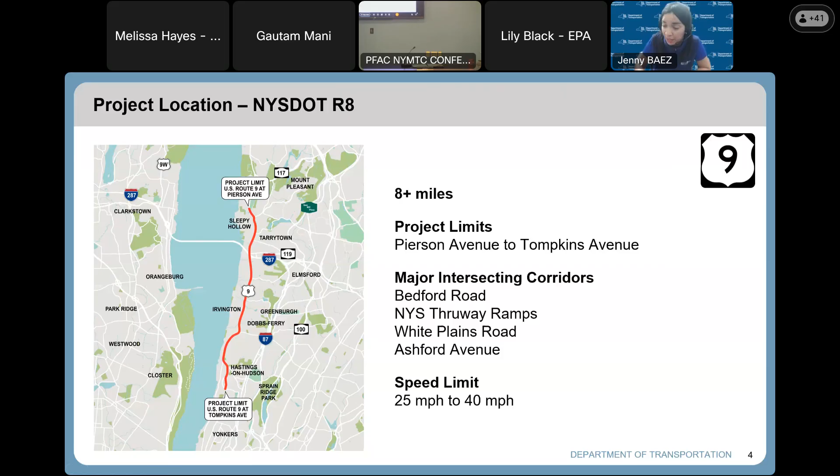This is a very important corridor because it connects the counties of Westchester and Rockland with the new Tappan Zee Bridge, and it also serves as a connection for 5 Metro North Railroad stations, the Bee Line, and the Lower Hudson Transit Link system.

This project builds on a strong foundation of planning studies and local visioning that preceded it. In 2018, for example, the Route 9 Active Transportation Conceptual Design Plan was undertaken by the 5 river villages that span the project. It was funded through the New NY Bridge Project Community Benefit Fund with the goal of promoting historic, cultural, and natural resources of the villages. It also aimed to enhance access to the new Tappan Zee Bridge and to accommodate all modes of transportation while enhancing traffic safety.

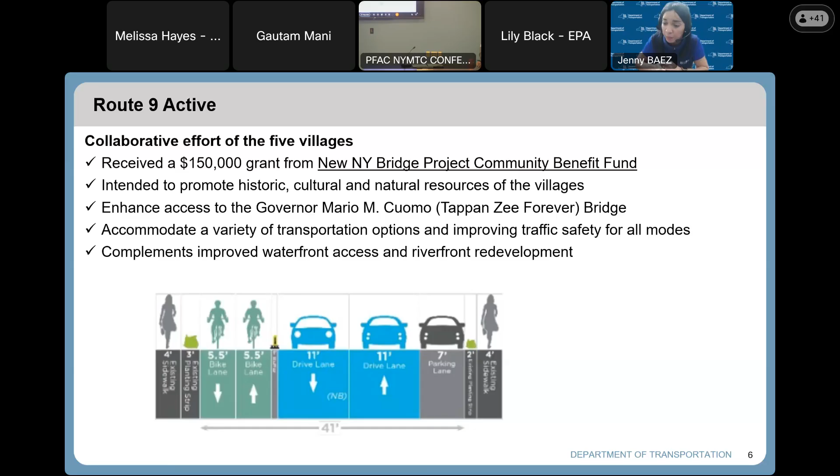The challenge we had here was to use New York State DOT required designs. We also needed to identify what cross sections remained feasible within the available right-of-way to accommodate sidewalks, buffers, widths of traffic lanes, and also parking spaces.

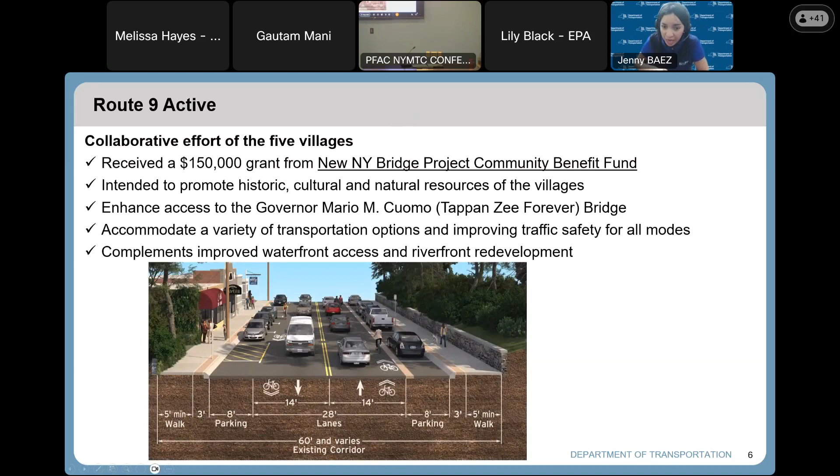The next slide will dive into the history of this area. This corridor is rich in culture and historic resources. So with that, I'll hand it over to Scott, who will talk about the area history.

Thank you, Jenny. Good morning, everybody. As Jenny mentioned, this area of the Hudson Valley, Westchester County, along the river through the 5 river towns or villages, you can't overstate the amount of history. If I had an hour to present this, I could do it just on the history.

So real quickly, I'd like to bring up that from Henry Hudson coming up the Hudson River in discovery, through the Dutch settlement in this area, the support of the Revolution, the French and Indian Wars, expansion for military needs, and eventually for travel through stagecoach, this corridor supported travel through Connecticut up to Boston and on up to Canada. Super rich history, and it's been ever evolving, which is a really good segue into the next slide.

That's the next step in the evolution of Route 9 through these 5 river towns. So what is a complete street? I guess the best way to state that is it's not a checklist. It's not a one size fits all. It's more like a process or a strategy and an expectation for an outcome considering context. So it's not going to be the same.

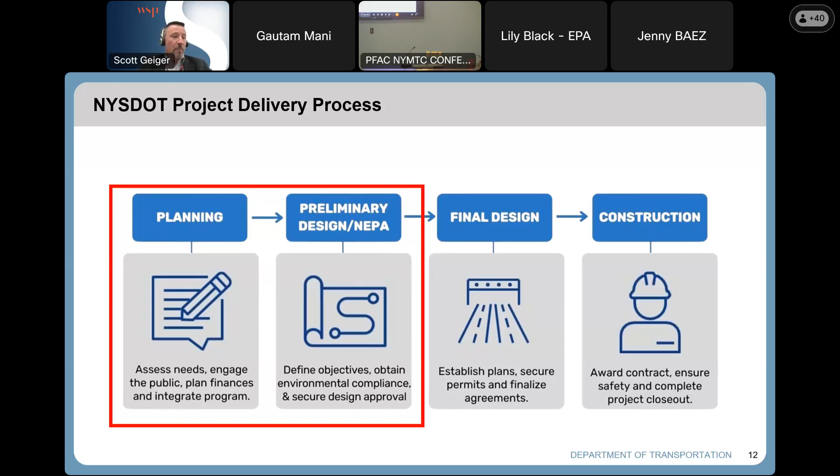Preliminary engineering, step 1: existing conditions and corridor vision. It's very important that we collect and understand the history, previous studies, needs, and future vision for each of the villages and the counties as a whole.

Step 2 is conceptual alternatives, which is really about the context and trying to be creative on how we can develop this roadway in a way that meets all the needs, provides the complete street, and moves it into the next phase of its evolution.

Step 3 was the evaluation of concepts that passed step 2 and become alternatives for consideration. They are evaluated against all the environmental, traffic, and other goals and objectives of the project created in step 1.

Finally, when we get through that, we document it in a design approval document, and we go again - I'll get into how we go through the process with the public through each one of these steps.

Segueing into that, here's the process with the public. This is a tried and true process where our first public meeting was our first elected officials meeting. We established a transportation partnering committee, about 20 or so individuals representing the 5 river villages.

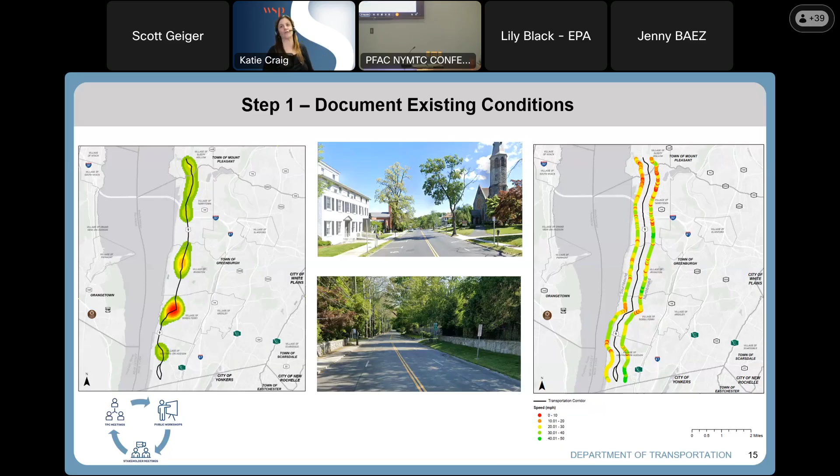The context of each one of these villages is very different, as you can see in these two photos. The first is Sleepy Hollow in Tarrytown, where you have one travel lane in each direction, as well as parking on both sides of the roadway with sidewalks on both sides.

The picture on the bottom is in the southern section of the corridor, the village of Hastings-on-Hudson - a much different context. You have a 2-lane section of roadway with sidewalk only on one side, as well as historical walls that line the corridor through these villages.

We can't touch these walls, we can't move them, and you can see discontinuous sidewalk on the other side of the road. So it's not only about the desktop reviews, but also immersing yourself in the corridor, getting out there, walking the different segments.

There were over 10 schools in this corridor, so we observed the many school arrivals and dismissals - how these students interact at the crosswalks is very different in the context of each one of these schools.

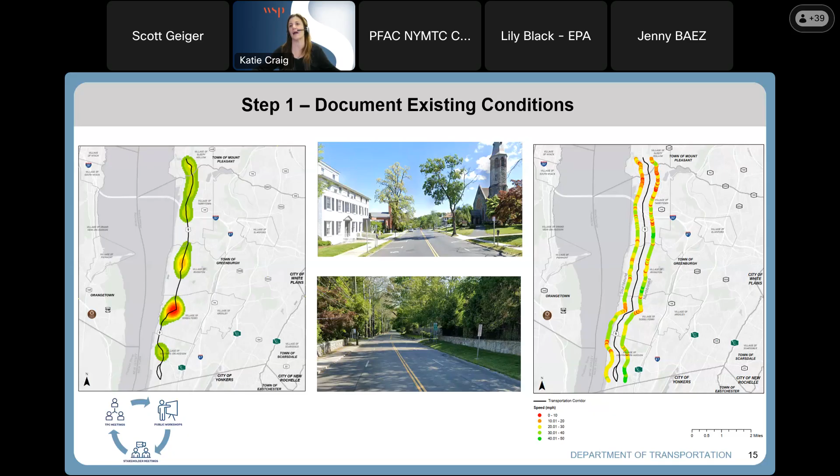So our step one, in this first phase approach, isn't just about the data that's out there today - it's understanding how the corridor works for all the users.

The second phase part of step one is developing your corridor vision, need, goals, and objectives. This is a structured 4-part framework that we use in all of our New York State DOT projects, and it helps set the foundation for every step of this transportation project.

As Scott described, we did this step with our TPC, our stakeholders, as well as the public in various different kinds of workshops.

First we set a vision - establishing the big picture, the broad sense of what you want the corridor to be. Then we identify and prioritize the needs in the corridor, not only as the project teams, but with our TPC and the public as well.

Then the goals are shaped by the needs that articulate the desired outcome we want to have for this project and this corridor.

Finally, we have our objectives, which make those abstract goals more concrete, measurable, and actionable. The objectives are very important because this is how we evaluate whether our concepts really pass the test and can be progressed.

Here's a little example of a worksheet that we use to help the TPC, the public, and ourselves prioritize the needs of the corridor.

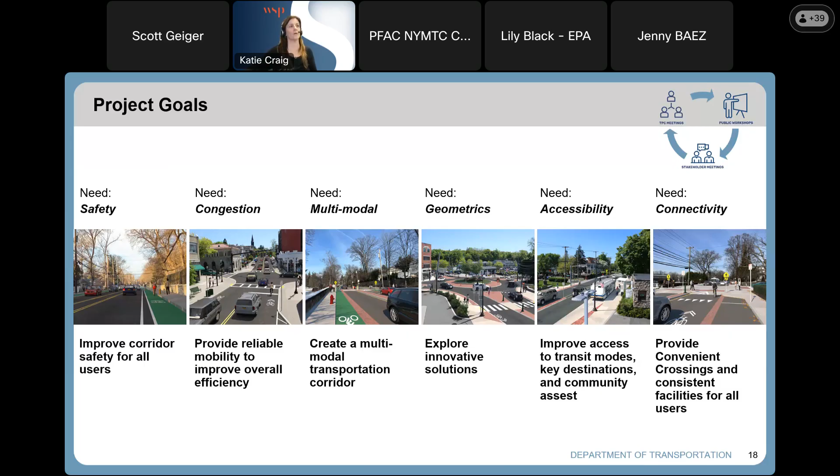So from our prioritized needs, we set our abstract goals, and our needs were safety, congestion, multimodal, geometrics, accessibility, connectivity. Those translated into clear goals: enhancing corridor safety for all users, enhancing reliability and efficiency, providing that multimodal corridor, exploring innovative solutions such as roundabouts, improving access especially to transit modes and key destinations in these historic river villages, and providing convenient, consistent facilities for all users and creating those missing links and connectivity in the corridor.

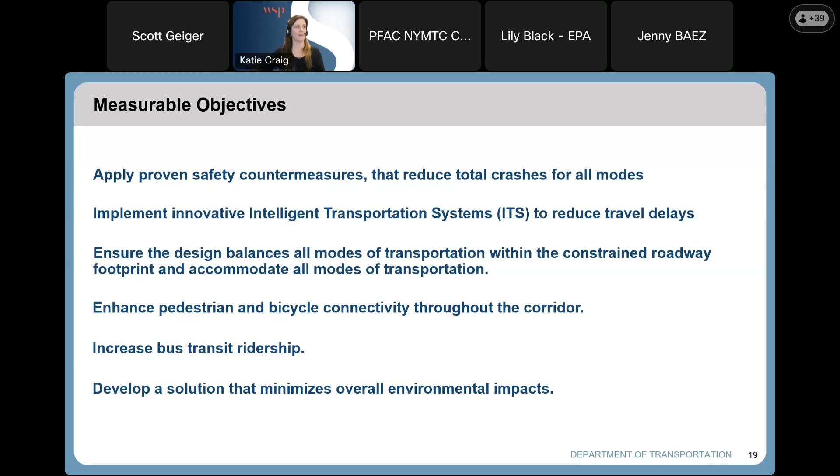Next, from our goals we identified our measurable objectives: to apply proven safety countermeasures that reduce total crashes for all modes of transportation in the corridor, implementing innovative ITS systems to reduce travel delays, ensuring balanced designs for all modes of transportation within our very constrained roadway footprint, enhancing pedestrian and bicycle connectivity throughout the corridor, trying to increase bus transit ridership, and developing a solution that minimizes the overall environmental impacts.

So once we had our step one locked in, we were able to kickstart step two, our concept development. Our team chose to do this by using an innovative workshop. What this really was for us was a one-day activity between WSP, our subconsultant HVEA, as well as members from New York State DOT's Region 8.

What this really does is foster creativity. It allows you to problem solve as a group and come up with collaborative ideas and strategies that help you think about how you're going to implement different techniques throughout the corridor, as well as making it a friendly competition. We broke everyone in these pictures into 5 groups, and kind of set the tone that whoever came up with the best solutions was the winner of the day.

The big part of this concept development is no ideas are off the table. You're always going to have someone who comes up with a crazy idea of either tunneling the whole corridor, viaducting the whole corridor, but maybe their crazy idea leads to thinking and strategies of, well, maybe we can't viaduct the whole area, but maybe there's a key location where grade separation may work. And that's kind of what we got out of this day.

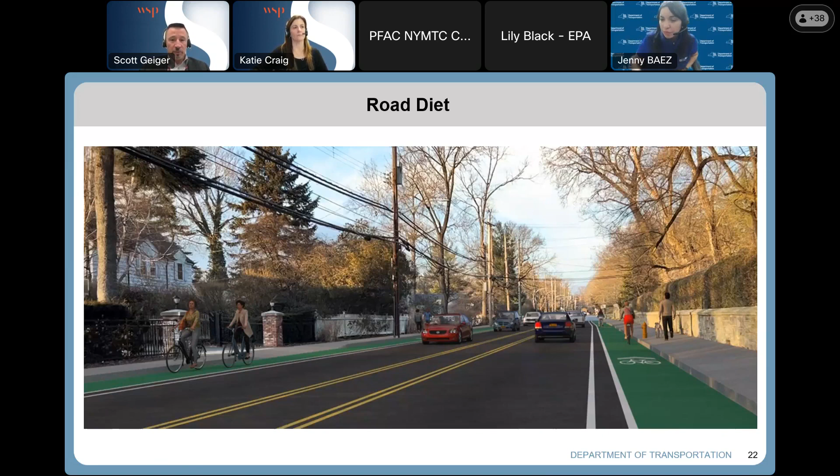Again, I'll emphasize this is a preliminary design, so details about median treatments and landscaping and those things, like the lighting Katie mentioned, will be applied to all these different applications, but just for purposes of the broad safety countermeasure, this is what we came up with. Next slide.

This allowed us in Sleepy Hollow to actually provide a shared use path completely all the way through, around these roundabouts, really addressing the needs of the school, connectivity to local roads and businesses, and it was really good for operational performance for vehicles. So reduced speeds, pedestrian safety - all well documented benefits of roundabouts.

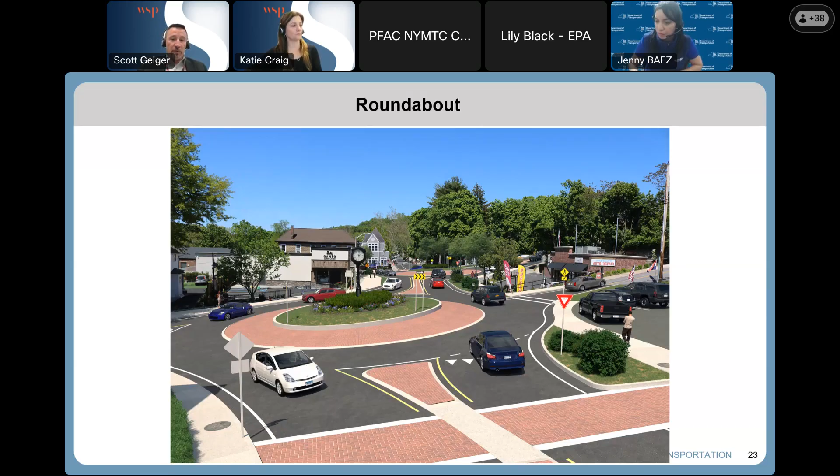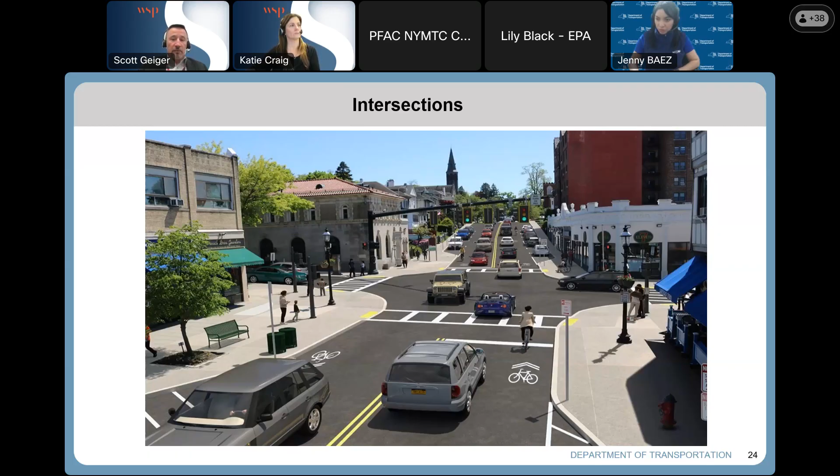So lots of things we can do, different treatments throughout this corridor, all in the backdrop of these design challenges or constraints we had to work with. You have existing grades, and right-of-way widths that make it difficult for ADA. We have on-street parking, which is always a balance between wanting to keep the parking for businesses or opening it up for dedicated bike lanes without the parking. Working with stakeholders to achieve that balance is really the challenge here, all while we have an abundant amount of historic and cultural resources through the corridor.

We have the transit, as Jenny mentioned, with train stations at each village and connectivity for pedestrians to access the train. And then we have the vehicles, and they have a need too - congestion, which impacts pedestrian safety and everything else. So balancing all that was our challenge.

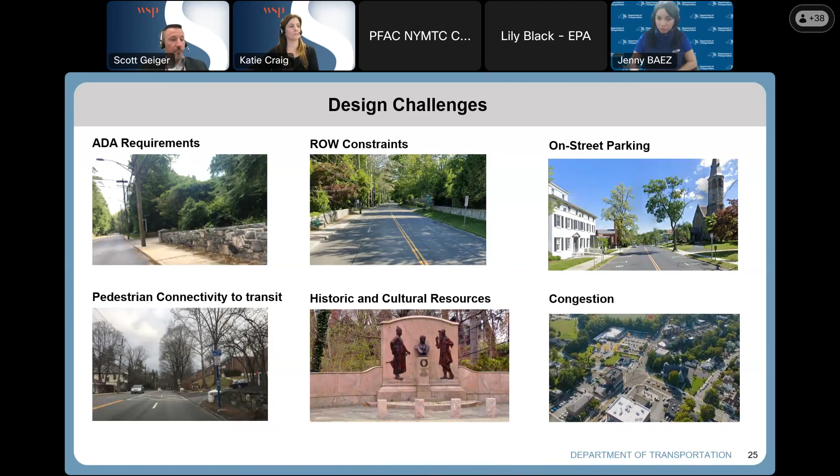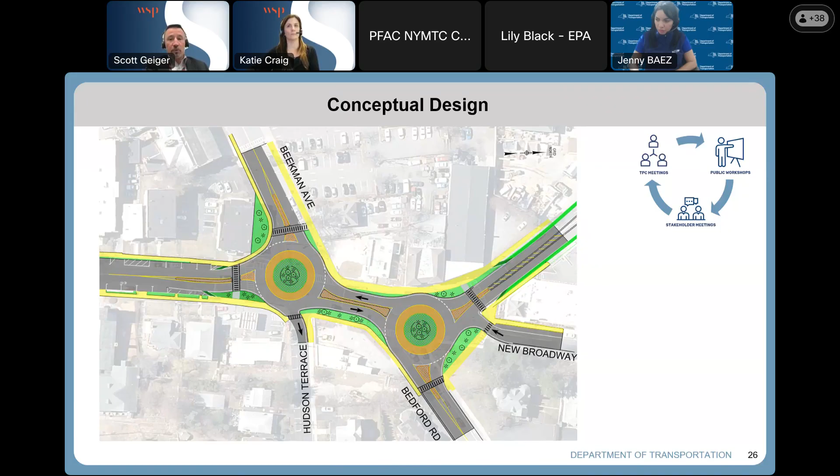Once you get to those concepts, we have to vet them through geometric, horizontal and vertical feasibility, the right-of-way footprint, operational performance metrics, safety performance, environmental impact, cultural and historic resources, and the businesses - are they constructible? Is it possible to even build this type of thing under these traffic conditions? I'll get to the phasing and delivery in a minute, and of course the cost is always important.

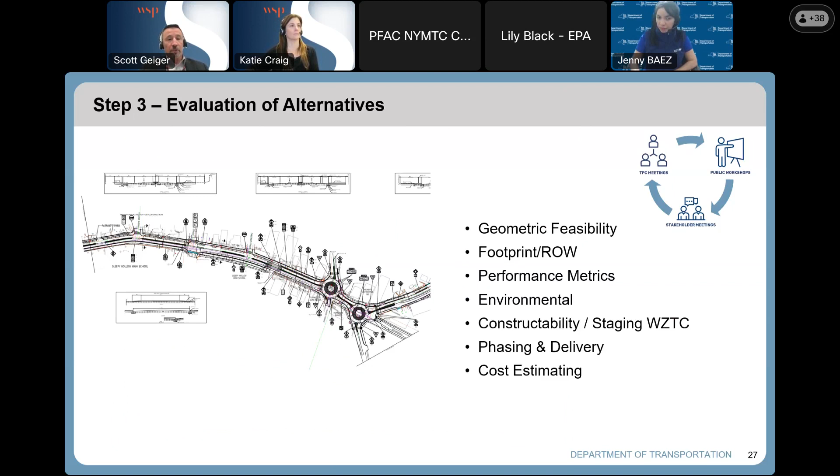So as Scott said, the evaluation of our alternatives - one of the things that was important for us was to do a detailed microsimulation traffic model. You're looking at here the software we use, PTV Vissim. We created a model for each one of our 5 villages, and this really allows us to test and visualize how our proposed concepts, which included roundabouts, signal coordination, ITS technologies, road diets, would actually impact our traffic operations at a microscopic detail.

Microscopic detail allows us to simulate individual driver behavior, such as car following, lane changing, how vehicles yield. It allows us to understand how the vehicles, pedestrians, and cyclists are all going to interact together in these constrained spaces that we have. Vissim also gives us the flexibility to model unique geometries like roundabouts and multimodal treatments that our traditional, more analytic or deterministic tools cannot do.

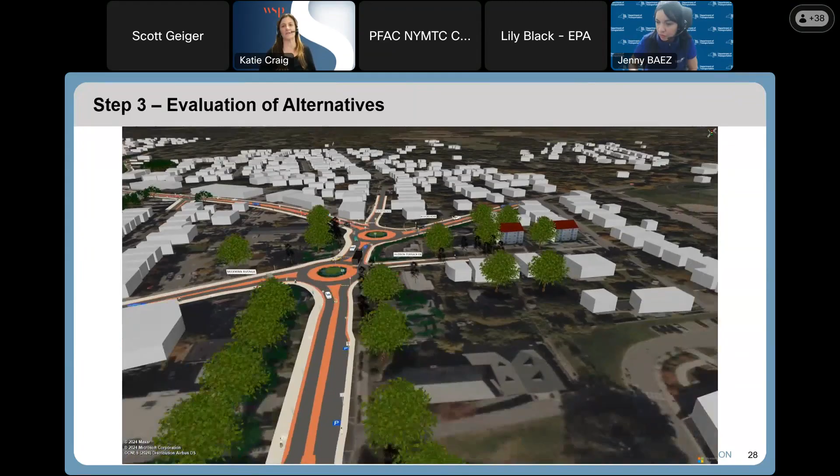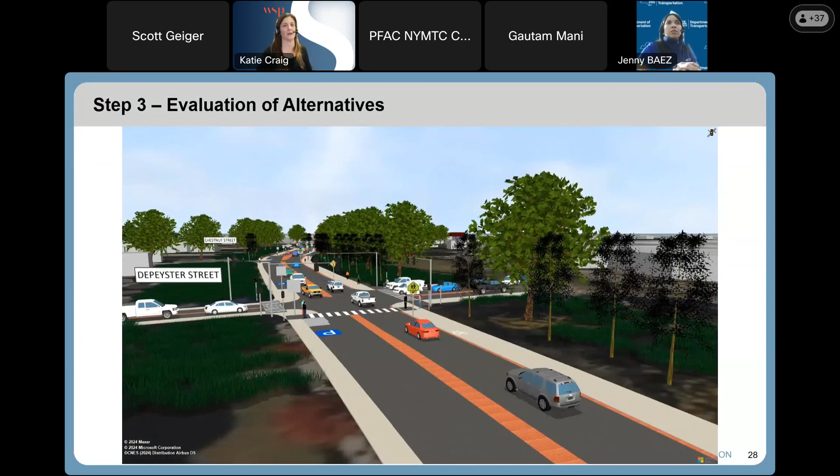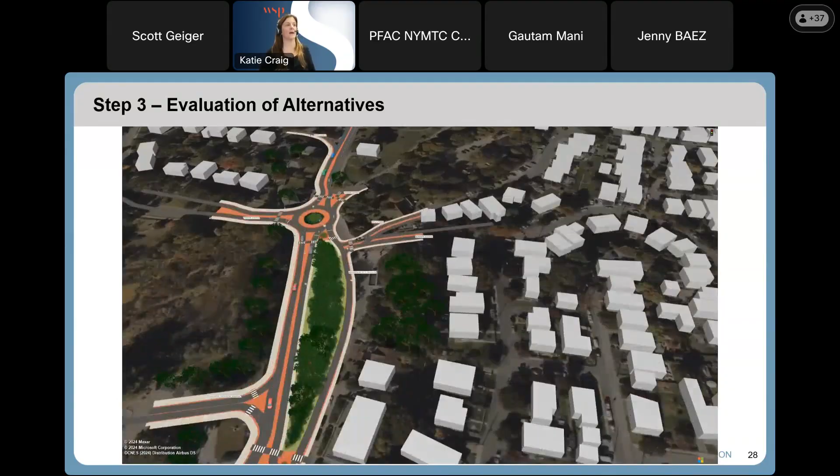And finally, the visualization, the 3D animations we can create from our traffic models, allow us to communicate our results to more non-technical audiences - our village boards, TPCs, the public, and maybe even some agency reviewers - in a way that's easy for them to understand. Within these models we also show existing conditions, and typically we'll show these and how they compare to each other. What our models really showed gave us confidence that what we thought would happen did happen - these roundabouts helped reduce delays, improve travel times, and we were able to meet those measurable objectives we set in step 1 of this project.

So finally, step 4 was our deliverables, and those are the design approval documents in the New York State DOT process. That for us included a draft design report as well as a 30% plan. One of the things our draft design report does is it outlines 6 logical corridor segments that can be advanced into final design for future construction.

You can see in this figure that this phasing approach lended itself towards the 5 villages. Some villages have more than one segment in them, but it gave us the flexibility for funding and also minimizing disruptions during construction. Each one of these segments could be progressed as an individual project, as they provide independent utility, and can stand alone as a meaningful project that would meet all of the objectives we set in step 1.

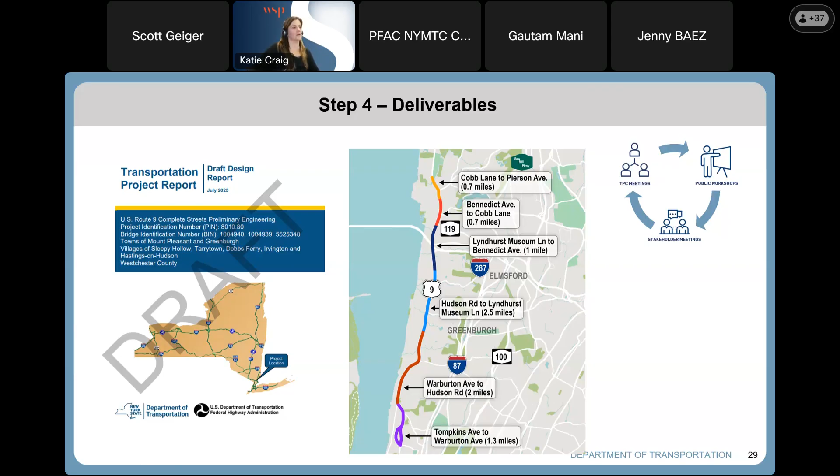Again, you'll see our little figure in the right-hand corner. All of these steps we did with our TPC, the public, as well as individual stakeholders. Really our key to success here was we followed a 4Ds framework, which aligned with our steps.

Discover is immersing yourself in the local context and the data of your project. Devise, in step 2, is creating that framework of solutions through collaboration, such as our innovative workshop. Step 3, distill, is where we refine and evaluate those concepts into alternatives, including getting feedback and public input. And finally, step 4, delivering.

Our draft design report is still up and available on the project website. It really did mirror a data-driven, context-sensitive report and plan, ready to be progressed into final design.

So that is all we had for today. I'm sorry if we went over 20 minutes, it was kind of hard to fit in. But if there's any questions, or Stephanie, if you want to take back over.

Great presentation, really informative and a really cool project. Thank you for sharing that. I agree, it certainly could have gone a lot longer and we would have had a lot more questions, I'm sure. But let's see if we have any questions right now.